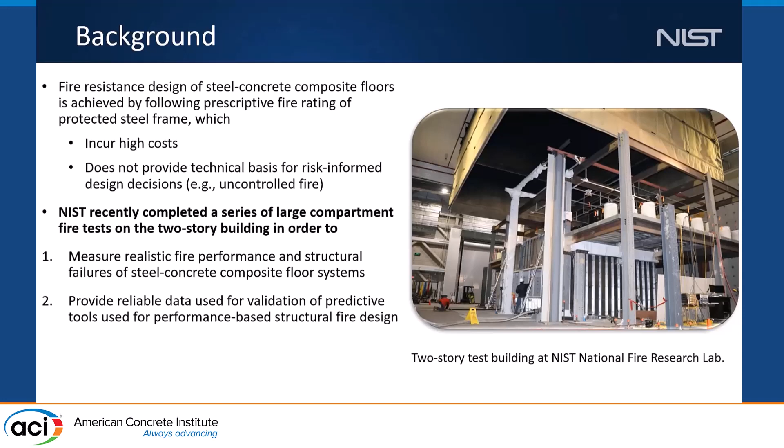The NIST fire test program basically consists of 3 large fire experiments conducted on this 6.1 meter by 9.1 meter composite floor situated within this 2-story test frame. For fire conditions, we basically use natural gas burners, which can create compartment fires up to a heat release rate of 12 megawatts. The test floor slab is loaded using hydraulic actuators, with values conforming to ASCE 7 load combination for extraordinary events, 1.2D plus 0.5 live.

We already completed all 3 experiments, but the 3rd test was most recently conducted, and we are basically performing some post-test inspections. So this presentation mostly focuses on the first 2 experiments.

The main difference between test number 1 and 2 is actually the slab reinforcement used in the concrete slab in the test bay. Test number 1 specimen used welded wire fabric, which is a very thin wire mesh that conforms to the minimum shrinkage reinforcement permitted in US composite floor construction. The effective area is about 60 millimeters square per meter slab width.

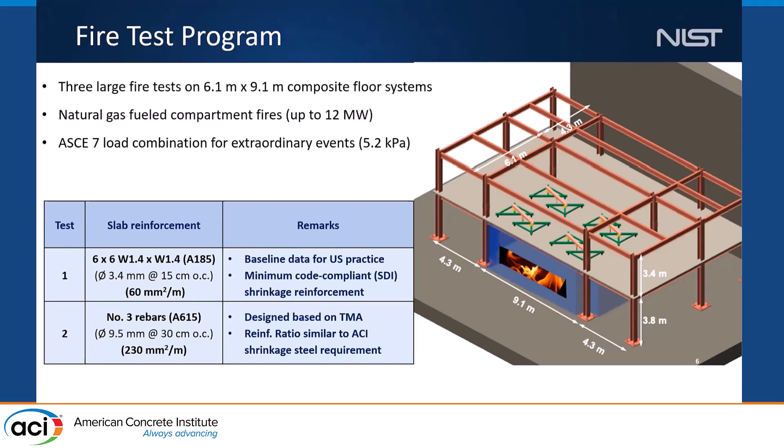In test number 2, we basically replaced this wire mesh mat with number 3 rebars in both directions at 12-inch spacing. This particular design scheme is based on the SPM method, incorporating tensile membrane action. The reinforcement ratio is very similar to the ACI shrinkage steel reinforcement, which is 0.2% of the concrete area.

So now we are looking at the schematic of a typical test floor assembly. As you can see here, the lightweight concrete slab is cast on this trapezoidal shaped steel decking, supported by steel wide flange shapes. This concrete slab acts compositely with the steel beams through headed studs. The support beams and girders are protected with fireproofing spray for a 2-hour fire rating.

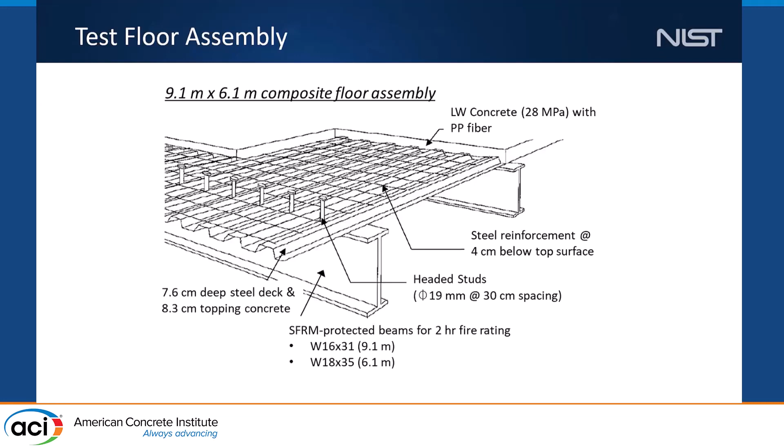This is the detail of the slab reinforcement used in the test building, basically showing the 2 bays by 3 bays on the floor plan. This is our test bay, reinforced with either the wire mesh mat or the number 3 rebars that I mentioned earlier. The surrounding bays are reinforced with number 4 rebars.

Between the surrounding bay and test bay is a slab splice design, as you can see from this photograph. It's nothing but a steel plate with a threaded bolt and nut assembly, and also some number 4 rebar, the continuity rebar, extended from the surrounding bay.

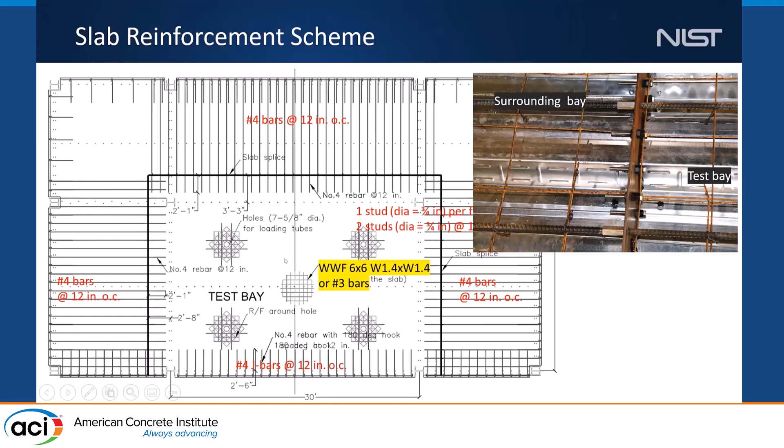The reason for this slab splice is that we'd like to reuse the surrounding bay for subsequent experiments. So after this portion of the floor slab or floor assembly is exposed to fire, we rebuild this portion of the test floor slab. As you can see, this is test number 2, the photograph before concrete casting. The surrounding floor slab is from test number 1, and this portion of the test bay is constructed new.

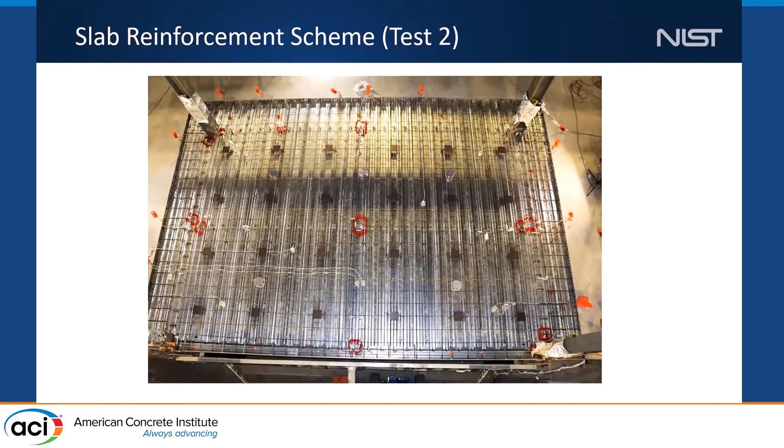This slide shows the concrete mixture design, the typical mixture used in composite floor construction with lightweight aggregate concrete. In these experiments, we used polypropylene fibers, FRC mono 150, to mitigate the spalling failure that could ruin the fire experiments. However, adding this polypropylene fiber is not very typical in common construction.

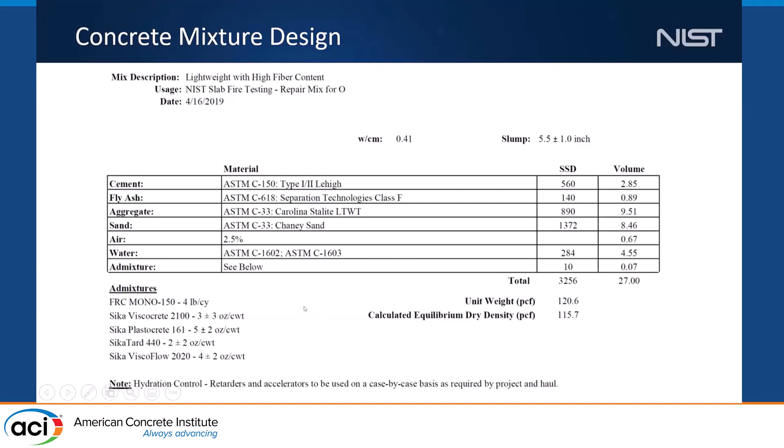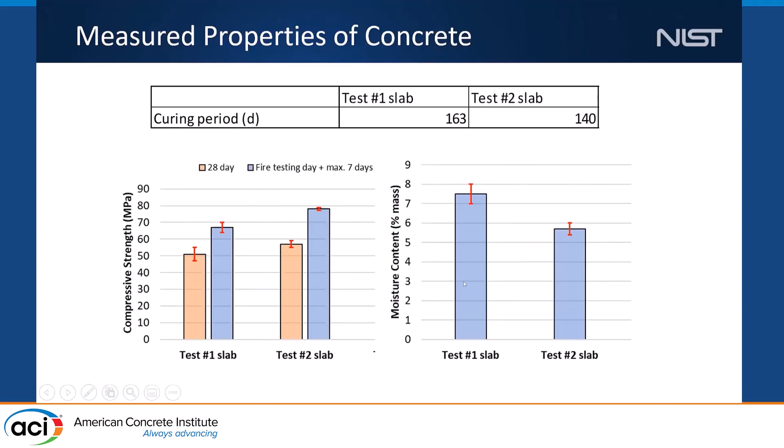I'd like to show you some photographs to demonstrate how we apply the mechanical and fire loading during the test. Now we are looking at the top of the floor slab, loaded using this specially designed steel frame, which provides the uniform floor load at 24 discrete points across the test bay.

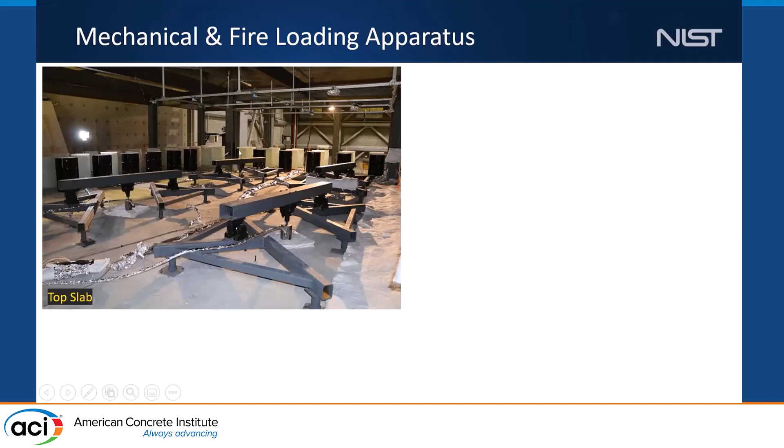The surrounding bay is loaded using water-filled steel drums or plastic drums, to simulate 50% of the office live load. This is the test compartment underneath the floor slab.

We used natural gas burners that create intense fire conditions underneath the test floor slab. This vertical line is the water-cooled loading tubes connected between the loading frame at the top of the slab and the actuators at the basement. In that way, we can create mechanical and fire loading simultaneously.

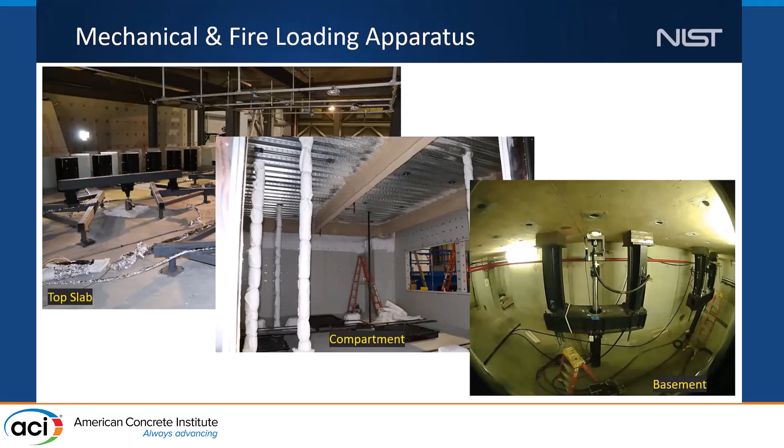Fire experiments are typically conducted such that we apply the mechanical loading at ambient temperature, which is maintained constant throughout the fire exposure. This slide shows the time history of the burner heat release rate, characterizing the fire intensity, and the total actuator loads.

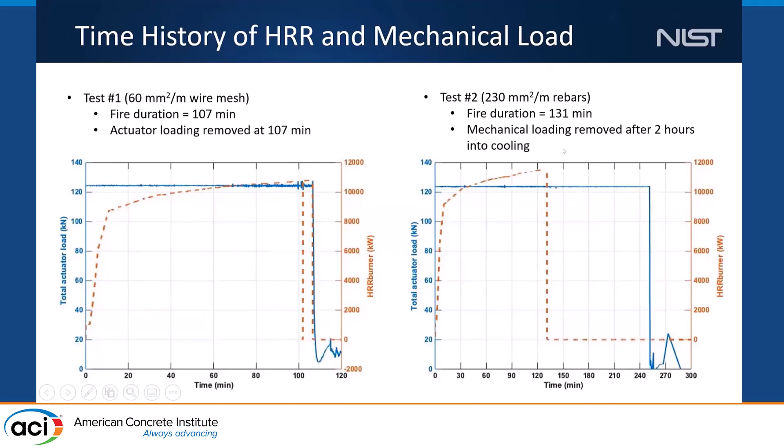In test number 1, the fire duration was 107 minutes, and we had to remove the fire and mechanical loading at the same time because we saw huge center cracks developing in the middle of the test bay. In test number 2, the fire duration was 131 minutes, but the mechanical loading continued over a 2-hour cooling period.

This test video shows the fire inside the test compartment. As you can see, it creates very intense, extreme heating conditions such that the upper layer gas temperature was in excess of 1,000 degrees Celsius.

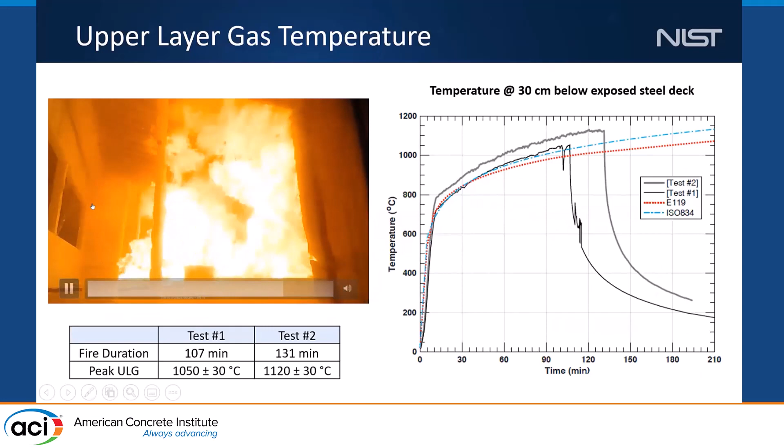Since we did special compartment design, considering the ventilation, thermal properties of the exposed wall, and distribution of the burners, the upper layer gas temperature was pretty uniform across the test bay, with a standard deviation of about 30 degrees Celsius.

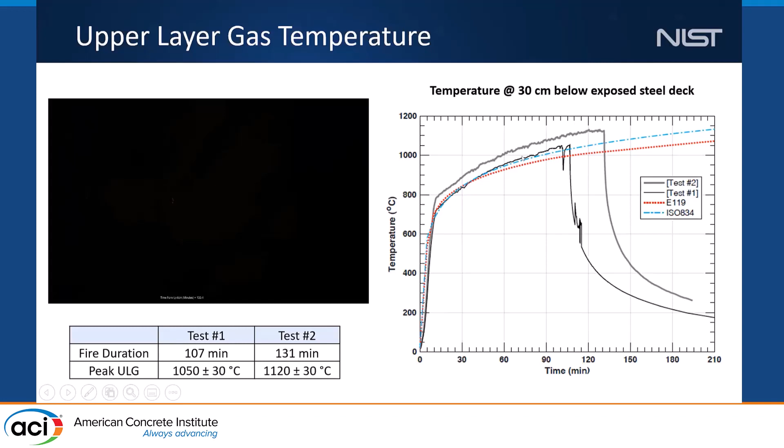We put lots of thermocouples embedded within the concrete slab and also mounted on the steel beams and connections, to quantify the thermal response of the floor assembly under fire conditions.

This slide shows the temperatures of composite beams at midspan. As you can see, the protected steel beam's bottom flange and web are heated to in excess of 800 degrees Celsius. However, the temperatures of the reinforcement embedded within the concrete topping, above this protected steel beam, evolved much slower and smaller. The thermal response between the two tests is pretty comparable.

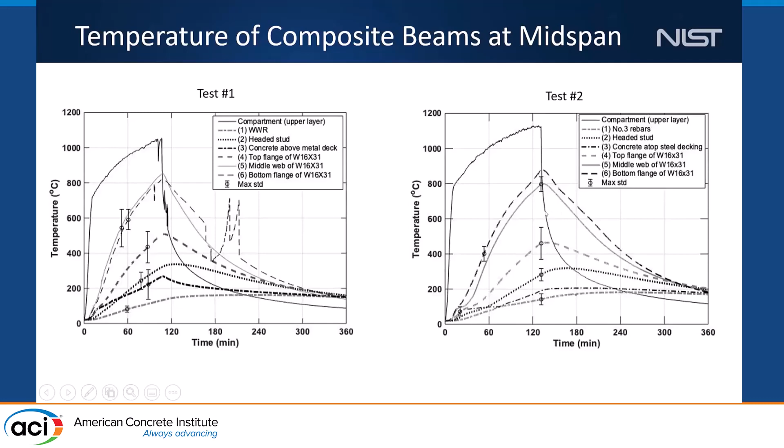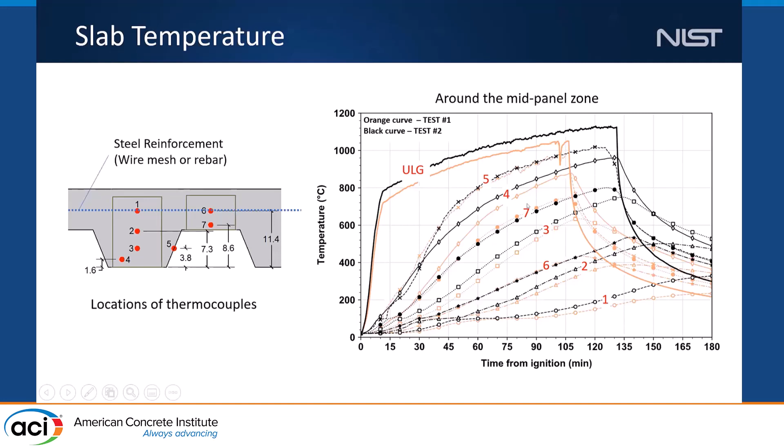This is the slab temperature, especially away from the steel beam underneath. The bottom side of the concrete slab, or the steel decking, is directly exposed to fire. Here the orange curves show the test number 1 results, and the black curves indicate the test number 2 results of the temperatures at different locations. As you can see, given the fire condition was pretty similar, the temperature evolution within the concrete was also pretty similar.

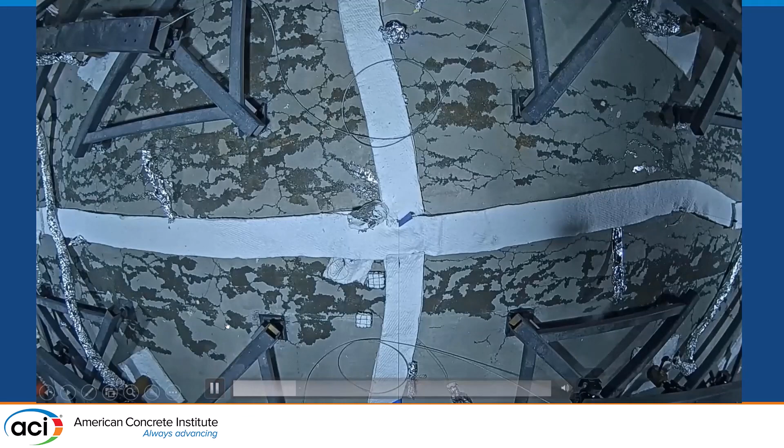We also put thermocouples mounted on the top of the slab to measure the unexposed floor temperature. As you can see, the top surface temperature is affected by moisture driven out from the concrete during the early phase of the fire. But once the moisture content is dried out, the temperature starts increasing. The top surface temperature was measured in the range of 180 to 230 degrees Celsius for test number 1 and 2.

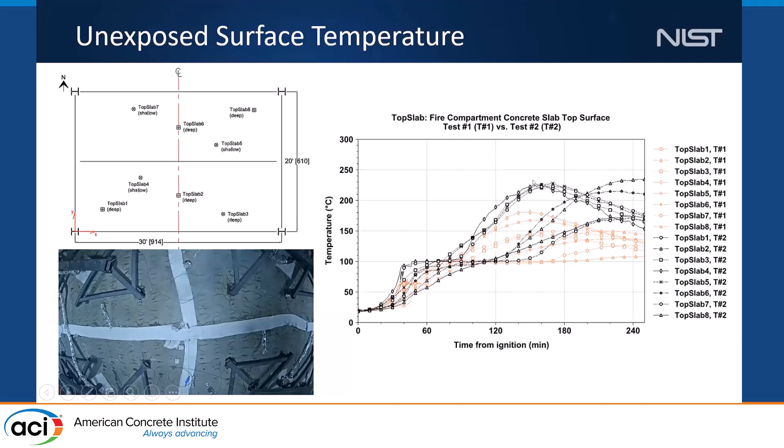Now I'd like to play the video showing the top of the slab. This little clock indicates the fire exposure time. This is the test number 1 video. As you can see, following the burner ignition, this heated floor slab continuously sags, and it was making lots of steam because of the evaporation of moisture. Around 70 minutes, we start to see the center crack happening in the middle of the test bay, which propagated toward the longitudinal direction.

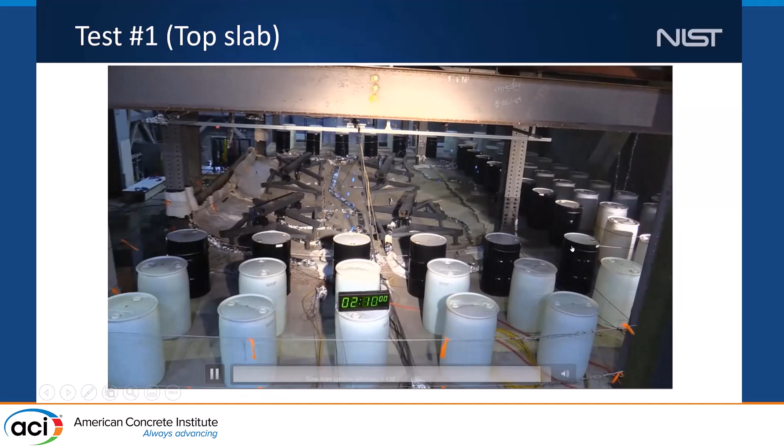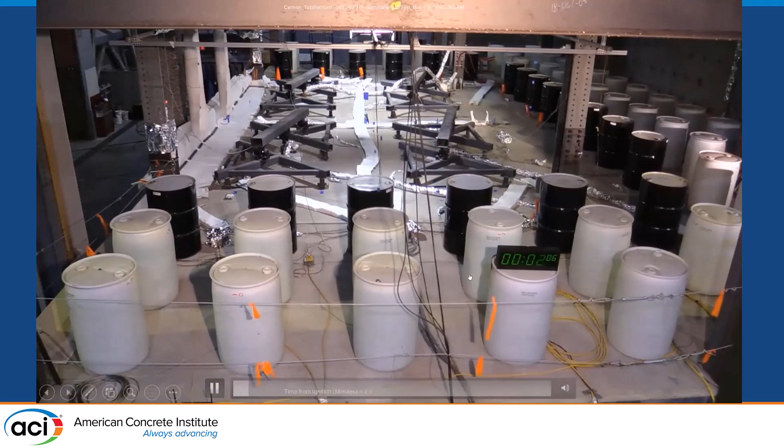This is the test number 2 video with a similar view, again showing the fire exposure time. As soon as the burner ignited, the floor slab starts to sag, but the vertical deflection of this particular floor slab is much more delayed, mostly because of the reinforcement embedded within the floor slab. But even after 131 minutes of fire exposure, there's nothing much you can see here.

Let's take a look at some vertical displacement measurements between the first two tests. We put lots of string pots to measure the vertical deflection of the test floor slab. The orange curves indicate test number 1 results, black curves indicate test number 2 results. As you can see, the mid panel vertical displacement reached around 30 centimeters.

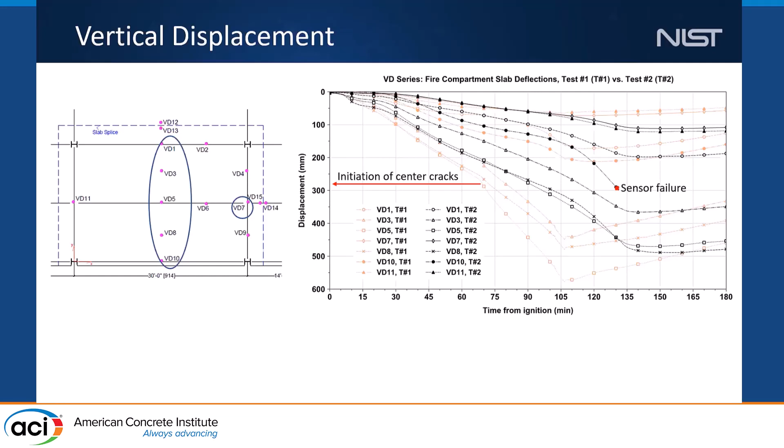We start to see the center crack developing on the south of the secondary beam. Once it happened, it changed the displacement gradient, and the displacement rapidly increased afterwards. However, for test number 2, the vertical displacement increased in a more gradual fashion, but it went all the way up to 50 centimeters. This is equivalent to more than probably the L over 20 ratio, the span length over 20 ratio that is permitted for standard fire testing. So it's a very large vertical displacement, but there's really nothing happening as a result.

This is a photograph of the top of the slab after the fire, once the specimen sufficiently cooled down. As you can see, the test number 1 floor slab was reinforced with a wire mesh mat. There's a large edge crack opening that happened first, mostly during the early phase of the fire. It's not really captured in the test video, but other evidence indicates this. That allowed a large end rotation of the slab edges, which accelerated the vertical displacement at the middle, eventually developing the crack opening at the center of the test bay.

Here is test number 2, reinforced with number 3 rebars in both directions. As you can see, there are small crack openings here and there, distributed everywhere, including some transverse and longitudinal lines. But it maintained the slab continuity very well during the fire exposure.

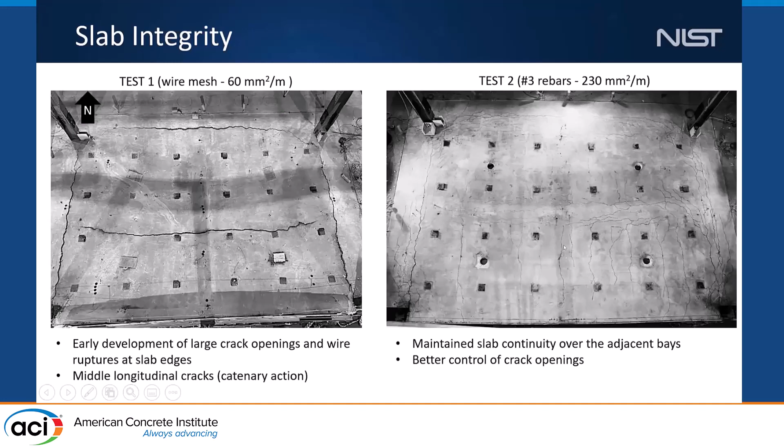In summary and conclusion, test number 1 was aimed to demonstrate or create baseline data for common US construction practice. We utilized a 2-hour fire rating for the specimen design, and also included the minimum shrinkage reinforcement. Even though the specimen was designed for a 2-hour fire rating, we observed that structural integrity failure was achieved around 70 minutes into heating.

This is mostly because of the early formation of the edge crack that allowed the large edge rotation of the slab, and also insufficient ductility provided by the wire mesh mat in that particular specimen. So this experiment is very important, providing good experimental evidence that prescriptive design is not always a safer and conservative method.

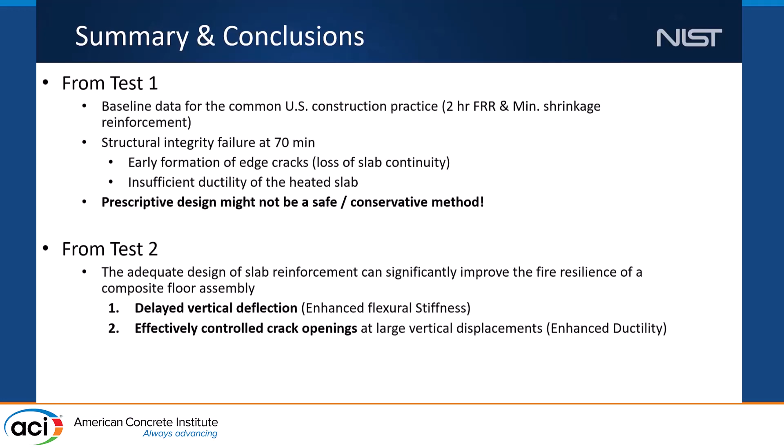Test number 2 mostly focused on the influence of slab reinforcement, and how it improves the fire resilience of the composite floor assembly. With adequate design of the amount and spacing of slab reinforcement, we can delay the vertical displacement and more effectively control the crack opening even at very large vertical displacement.

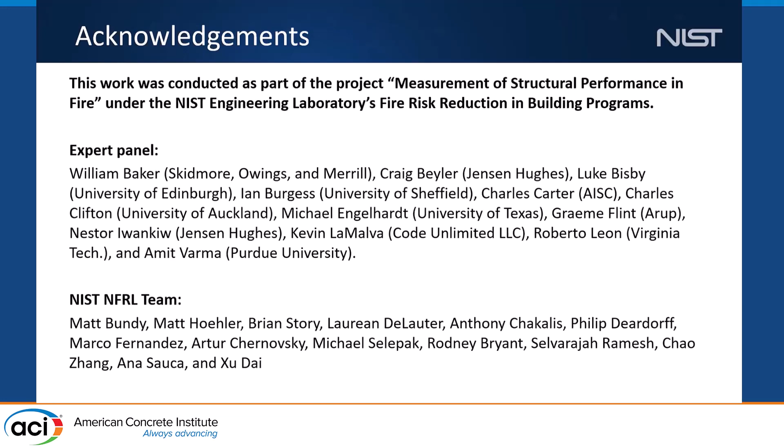This project is internally funded by NIST as part of the measurement of structural performance in fire, within the fire risk reduction in building programs. We have expert panel members invited to discuss the test results and experimental design, and NIST and other teams working behind the scenes to make our experiments successful. Thank you for your attention, I'll take any questions from the audience.

I do have one really quick, Lisa. Showing the videos, you had the water that formed on top of the slab, and you had the gas coming up. What do you think would have happened if there was an actual finished floor there—say a sealed tile or vinyl flooring that wouldn't have cracked and allowed that to come through? Do you think that could have built up in the slab itself and caused other problems? Did you guys investigate that at all?

I think we really didn't consider the floor finishing for that. Basically the moisture—here's the thing, mostly the fire is happening in an existing building that's been cured and dried for many years, so I don't know whether this moisture content coming out from the concrete is very typical, but maybe it's more relevant to recent construction. If we don't have this moisture coming out, it's actually making evaporative cooling on top of the slab. So with a much drier condition, I guess it would directly hit the floor finishing and burn up. That's what I guess.